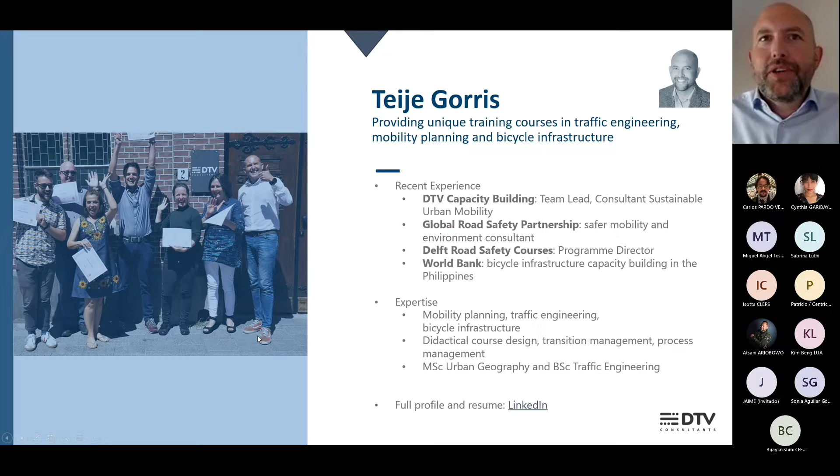I'm educated as a traffic engineer, so I will mainly focus on engineering. I also think that safer road design, the engineering part, is really a basis for effective enforcement and education. So I think safer mobility interventions in the end should not start with enforcement and education, but start with a safer road design.

And with an engineering bias, I'm also Dutch, based in the Netherlands. I have decided to choose a bit of a cycling bias for today, also to bring about some messages I would like to share.

As a Dutchman who cycles, I don't consider myself a cyclist - for me it's a mode of transport, one of the ways to drop off my kids to school. These are my sons, Thomas and Pim, now at the age of 6 and 10, so they ride their bicycles, and they also wish you good luck for this session today.

I also thought, should I start with theory and concepts, or just dig in? I chose the latter. So I will start with some pictures and examples, and I'd like to invite you to contribute and put some responses in the chat. Now I have to admit, I have to seek for the chat window - yes, you have to arrange some windows over here.

So what I'm going to put on the screen is a picture of a Dutch intersection. I'd like to raise an open question: which kind of safety features can you recognize here? Could you provide your answers to this question in the chat? If you see something, just write a couple of keywords and put them in the chat, please.

So what makes this a safe intersection? The first ones - take some seconds to think about this. I see some good stuff coming up already, that's great, thanks. So I know you are there.

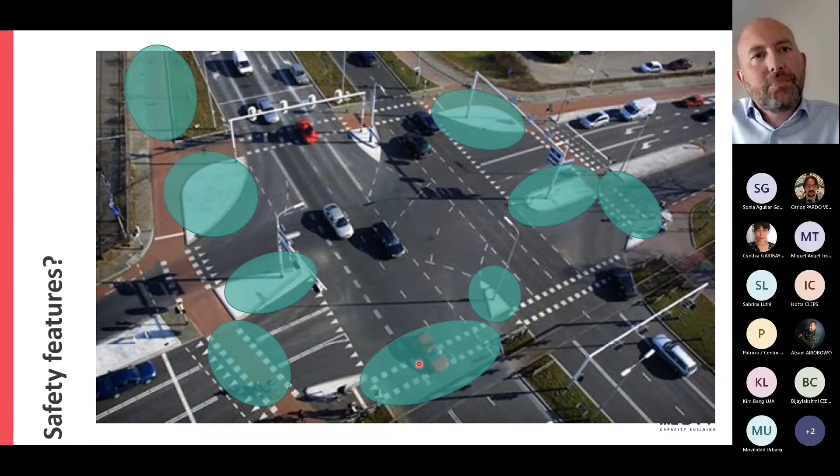Also markings are used - bicycle lanes are supported with markings, and motorized traffic lanes are supported with some markings too. This is the theory, and I've summarized it here: the priority arrangements of cyclists follow the priority arrangements of the main carriageway. Where cyclists don't have priority, the red paint isn't used.

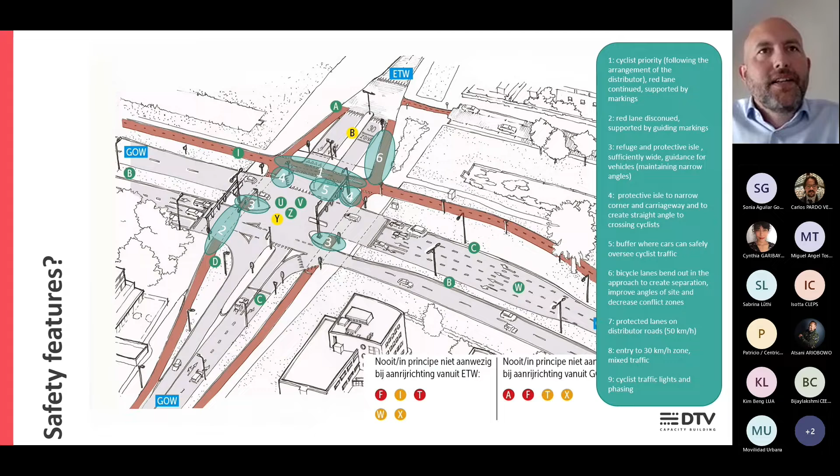The protective isles are visible also in the corners, with narrow lane widths and some buffer space for cars to yield when necessary. There's the bending out in the approach, and bending in after the intersection. Protected lanes on distributor roads show quite some space for separation and protection, and only after the intersection do we enter a living street or living area.

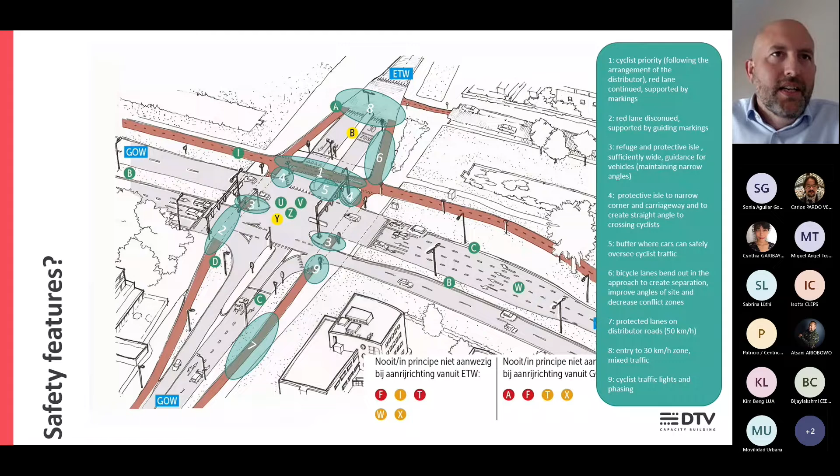Traffic lights are highlighted here. This was a Dutch example, but we also see this internationally to make intersections safe. This example was quite big - this is a smaller one, also from the textbook.

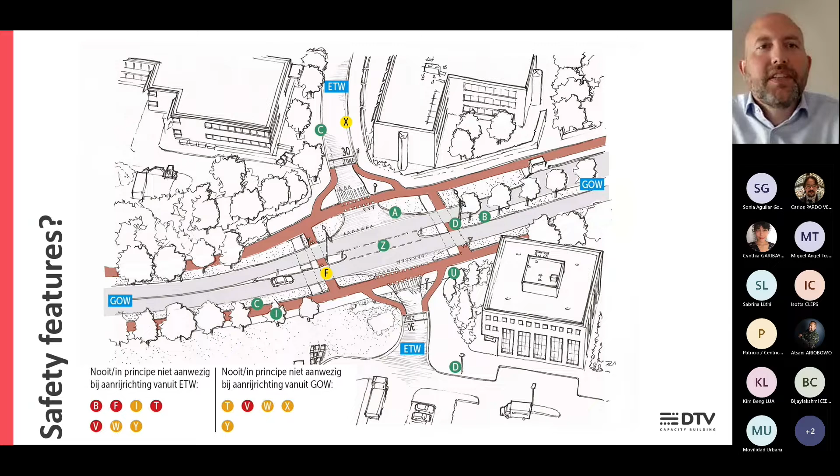This is a distributor road crossing with a living street, a residential road, no traffic lights involved. We have the priority arrangements, with markings supporting and identifying that, and signage highlighting it as well. At this stage, cyclists and pedestrians do not have priority - it's the motorized traffic ongoing here that has the right of way.

The protective isles are in place here too, also in the corners, with some buffer zones for right turning traffic that needs to yield, giving them a clear angle of sight. Coming from the north approaching the crossing, you bend out, creating room for these protective isles and better lines of sight.

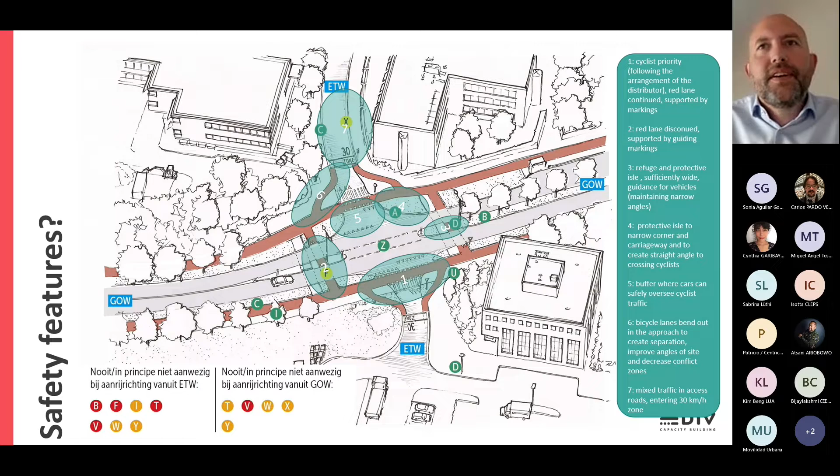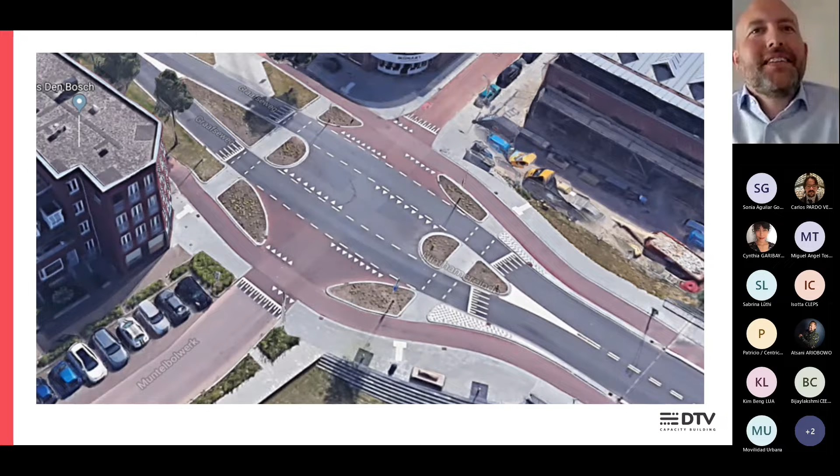And this is how it looks in practice. There's no traffic in this picture, but it shows that it can be realized. Perhaps there's quite some room over here.

And we also like to see roundabouts for crossings to be a safe solution here, both for flow and for road safety.

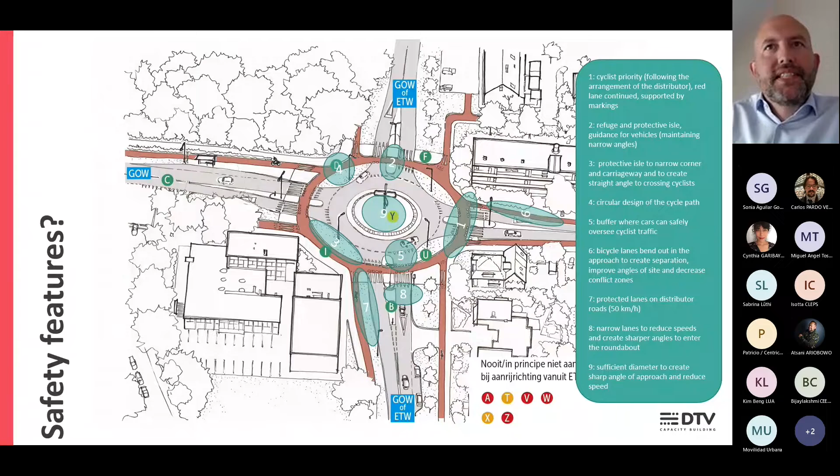Summarizing some key features: physical separation of vulnerable road users, delineation through markings and separations, which is really important. Try to minimize the exposure through refuge isles, smaller profiles and radii. We try to avoid slip roads and avoid unnecessary road space for motorized traffic which is not used or not necessary. Straight angles in the approach and understandable situations. By doing this, we really try to reduce speeds and create understandable traffic situations and lines of sight.

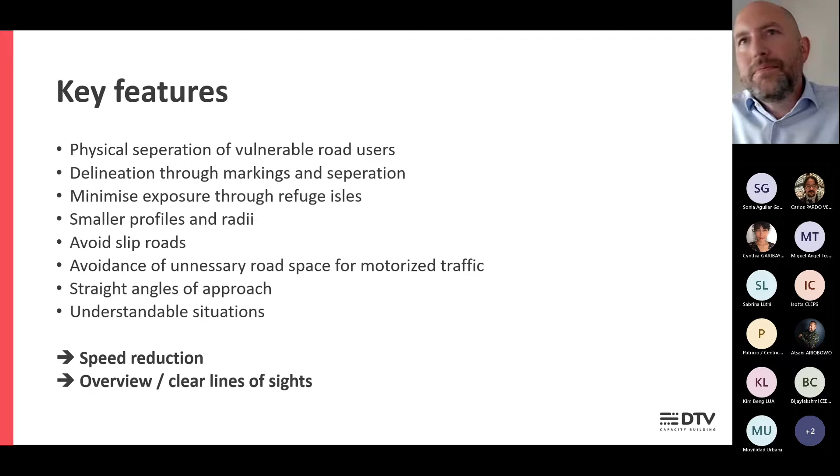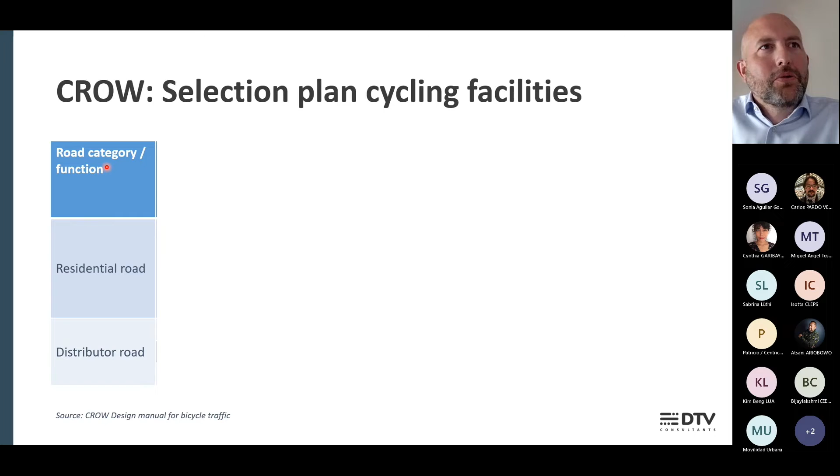Also to continue with some examples, bicycle examples on the section parts, and I'll later explain why I'm focusing on this so much. So also how we do it in the Netherlands in this case - where do we plan what type of cycling facilities? We really start with what kind of road category we're thinking of: is it the residential road or is it the distributor road?

What are the speed limits involved? We have various types of distributor roads. The residential roads in principle are at 30 kilometers an hour. The volume of traffic we take into account on the residential roads. In distributor roads we don't, and I will also explain why.

So next to the road type and the characteristic of motorized traffic, we also consider what type of bicycle network, or which part of the bicycle network are we discussing. Is it just basic, or is it part of the main network, or is it even higher up, the highest level in the hierarchy - could be a bicycle highway even. And based on that, we come to a selection.

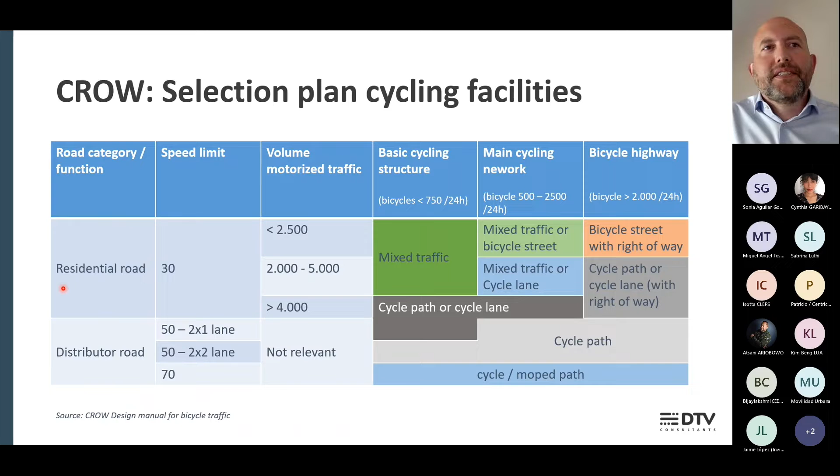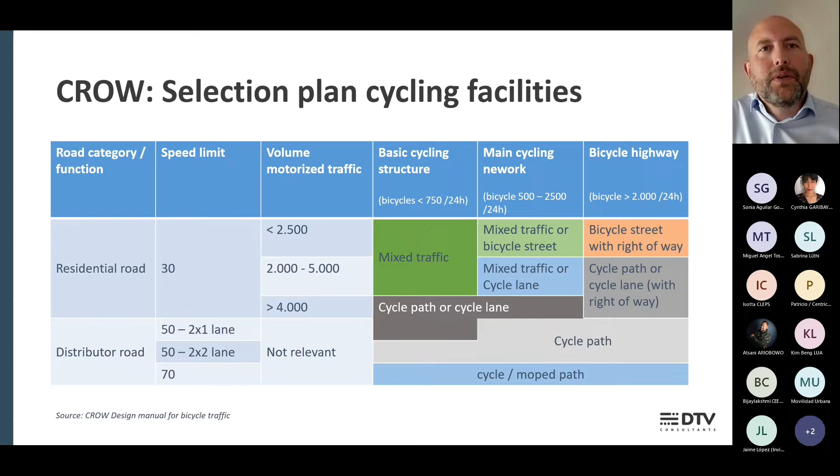So you see at residential roads, well, we also try to mix, or we make some separate paths or lanes because it's the highest in the hierarchy. So we really want high quality bicycle lanes. And there we want to consider paths also at higher traffic volumes. As you can see, if we are above speed limits of 30 kilometers an hour, up to 50 and 70, we really want to go for separated paths. At lower speeds we could have an exemption, but in the majority, we really want separation because that's safer. That leads to these kinds of profiles.

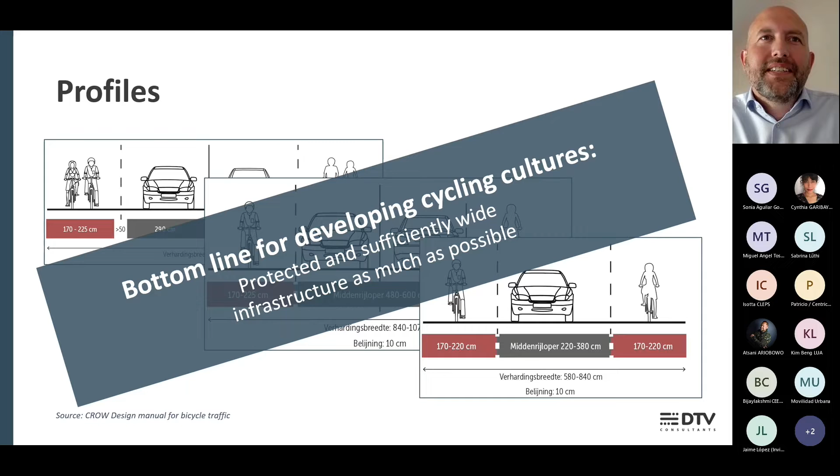This is all in Dutch, but I think the bottom line, what I'm trying to say here, is also for developing cycling cultures: it's really to have infrastructure for vulnerable road users, cyclists, pedestrians, protected and sufficiently wide as much as possible.

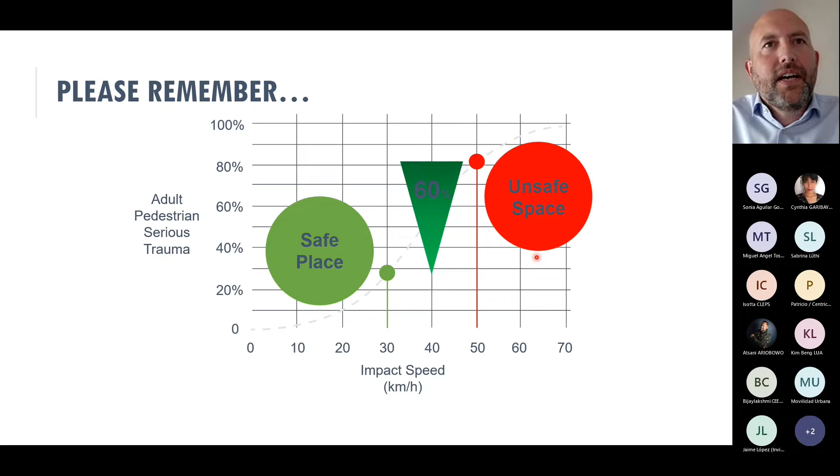The idea behind this is that the difference between impacts at 30 km/h and 50 km/h is really significant in terms of trauma. So you could say up to 30 km/h it's a safe place, which is why it's relevant to mix cyclists with motorized traffic. But at higher speed limits, it's unsafe, and that's why we want to have it protected.

We also need to see this in the context of movement and place. We have areas in our city designated for movement, or outside cities, motorways, or corridors leading into cities, dedicated for cars, for motorized traffic. These are the arterial veins for this kind of traffic. On the other side, we have places for people, like parks and parklets, where we want to stay and be.

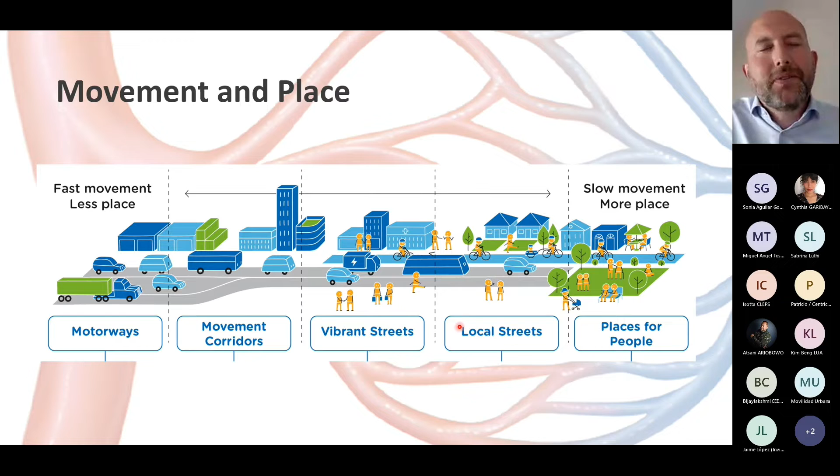In this figure, there is motorized traffic, but it's also in the area in between where we need to be careful—the local streets, the vibrant streets, where we have both. Here we really don't want to be as a pedestrian or cyclist, because it's not pleasant, not comfortable, not attractive, and it is unsafe. So if we're thinking of cycling or walking, we should think of other routes, other connections. Here in vibrant, local streets, we really need to think about speed management and separation.

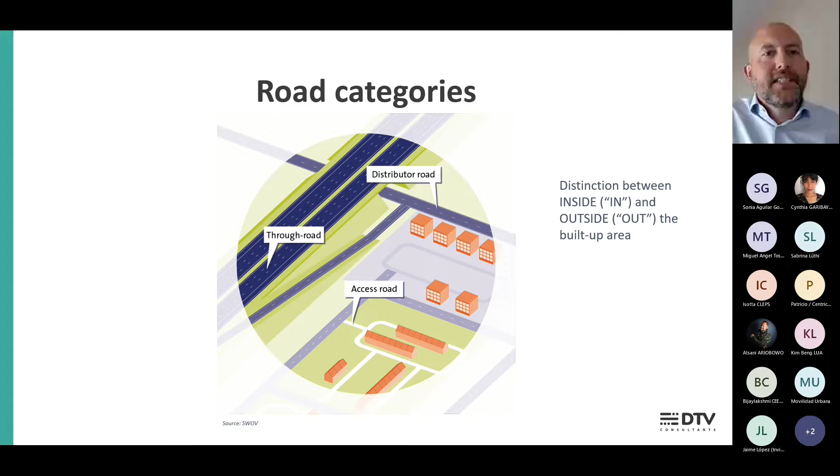In this context, it helps to think in road categories—making some roads for flow, for movement, optimized for traffic volumes and speeds. We have distributors connecting the flow roads with cities and residential areas, and access roads to really connect and arrive at your destination. So we need to think about what the function of the road is. I just highlighted the Dutch differentiation, or variation.

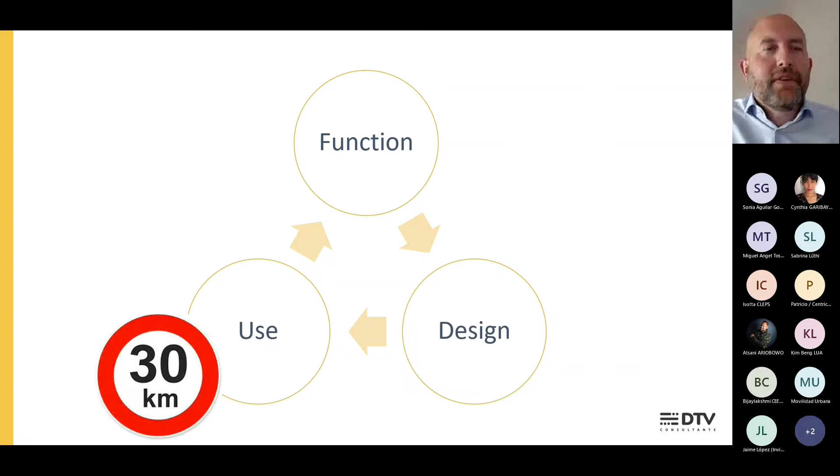Following from that, we want to design for a design speed—the maximum speed—and decide whether you want separated bicycle lanes or to mix them. That should lead to a desired and safe use. In other words, if we want traffic acting at a speed limit of 30 km/h, we want the design to invite that behavior, and to assign parts of the network to be residential streets at 30 km/h.

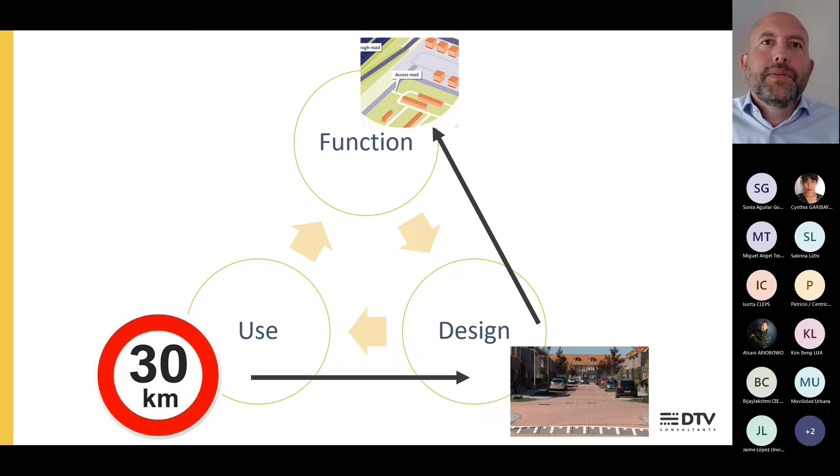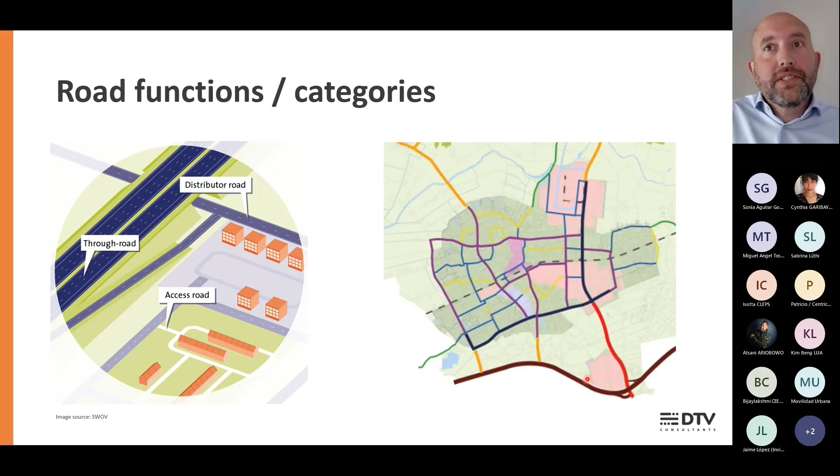This could be integrated in network plans, assigning in urban areas—and also outside—which roads are intended to distribute, which roads are intended for access, where we want to concentrate motorized traffic, and where we want to prioritize vulnerable road users, designing accordingly.

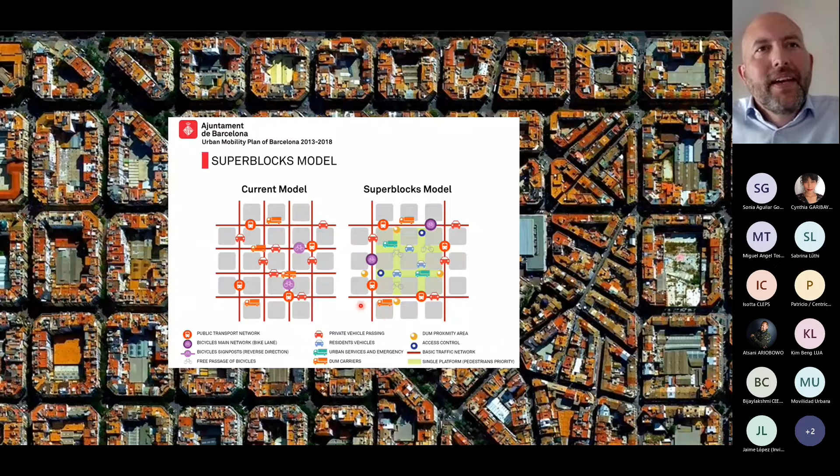To conclude, some examples. In terms of network development and planning, this is Barcelona, where they use superblocks to cut out some elements within the larger blocks, cutting down traffic there and prioritizing cyclists and pedestrians on the inside, while concentrating the bigger flows of traffic on the outside. So it isn't necessary to have car traffic everywhere—we can concentrate that on the edges.

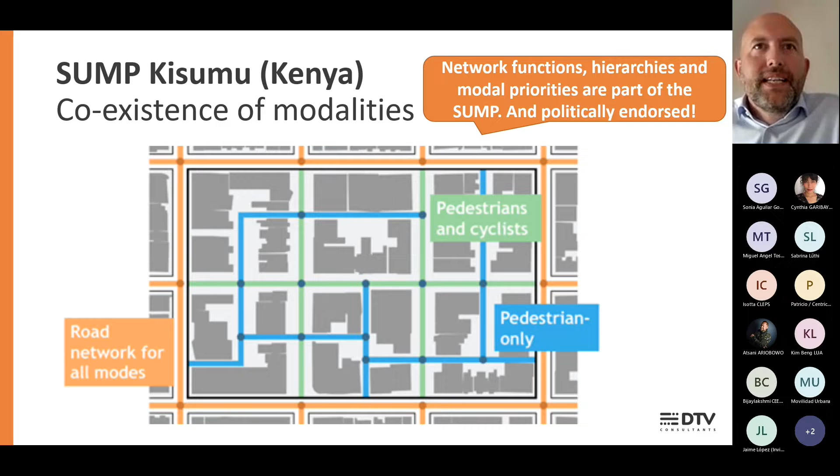It's not just in Western cities. This is an example from the SUMP, Sustainable Urban Mobility Plan, of Kisumu in Kenya, where they did the same—assigning road networks for all modes in their grid, while also prioritizing vulnerable road users in certain areas and implementing safer design. These functions and priorities are also part of the policy plan, and in that sense politically endorsed.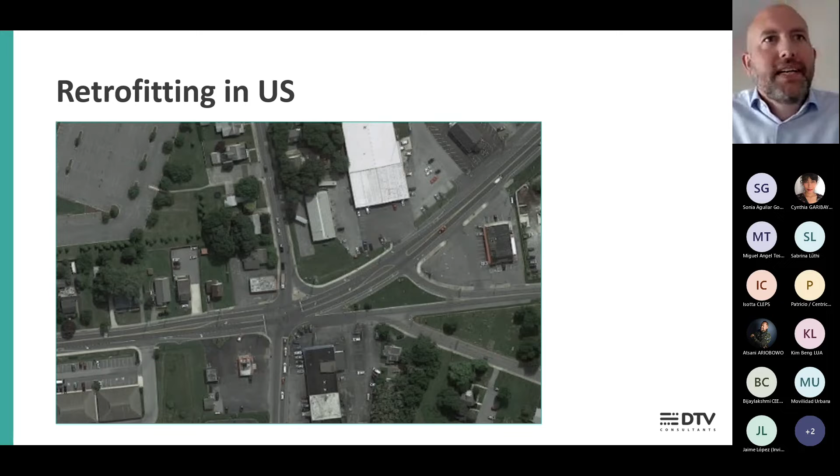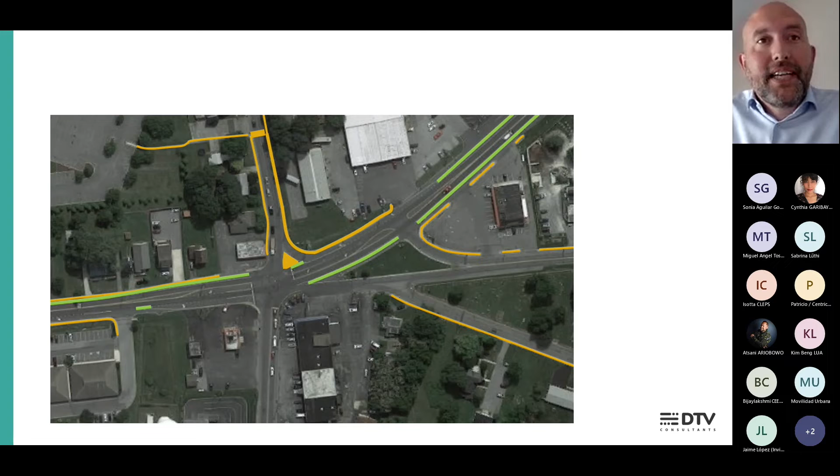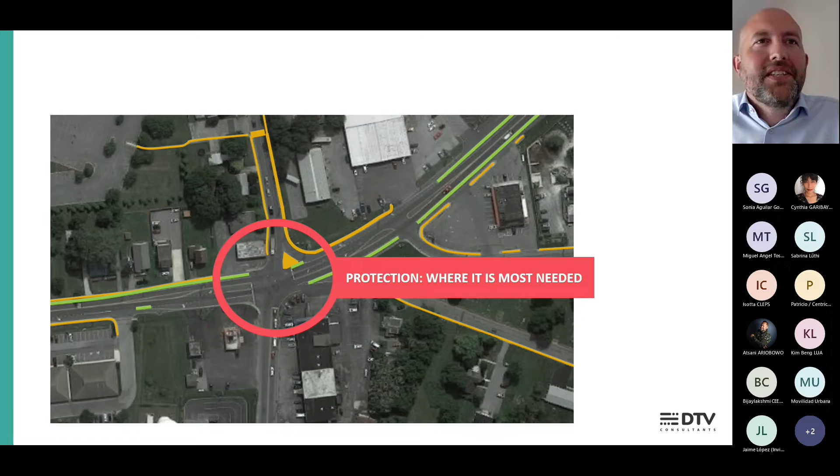Some examples we worked on in the US, also typical US intersection close to a high school with some infrastructure for pedestrians, cyclists, not really optimal yet, and the protection where it's most needed in the intersection. So this could be treated like this, coming back to the example of the intersections, the protective islands again, the bending out, the zebras there in place.

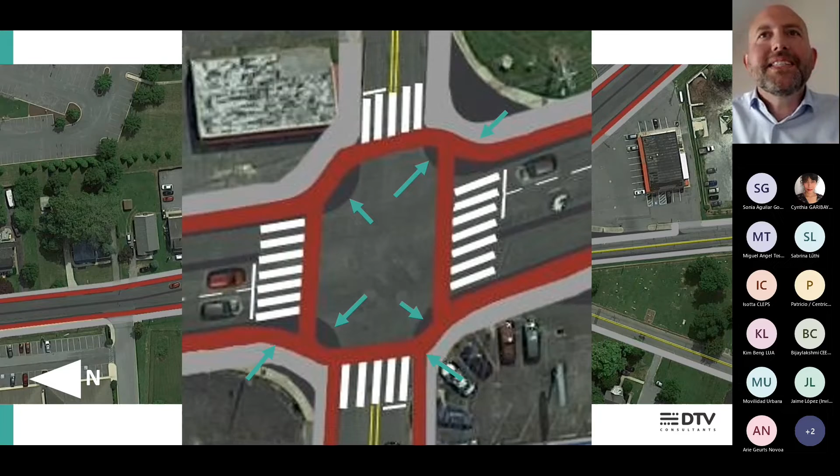This is mentioned here, so perhaps a lot of information for this short, a little bit more than 20 minutes. But I think safer road design really starts with thinking at the network level, categorizing your roads, really to consider separated infrastructure for vulnerable road users in case of speed limits more than 30 km/h. Delineation really helps, and space for motorized traffic is often over-dimensioned, I would say. A lot of times, people or decision makers or road authorities think this space is necessary, but I think facts will show that this is not the case.

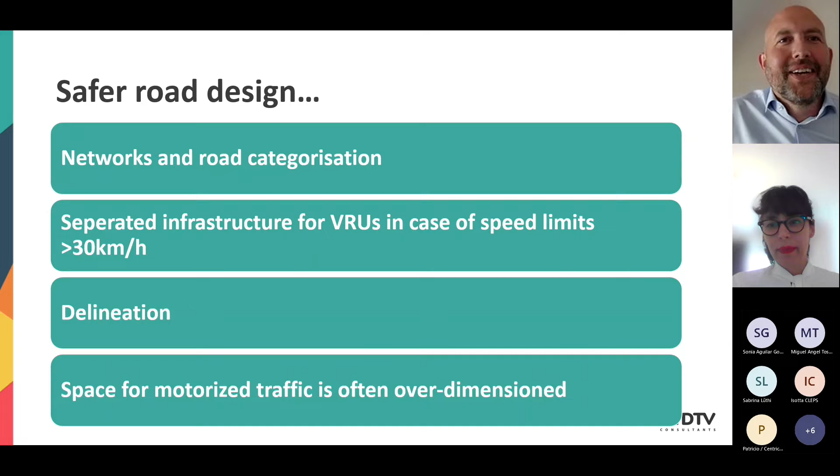So this is where I conclude my story. If you have project designs, as GRSP consultant I'm able to support, help out on reviewing some projects you are working on. And we could also consider setting up training to really dig into the details of some of the elements I introduced today. So thanks for your attention.

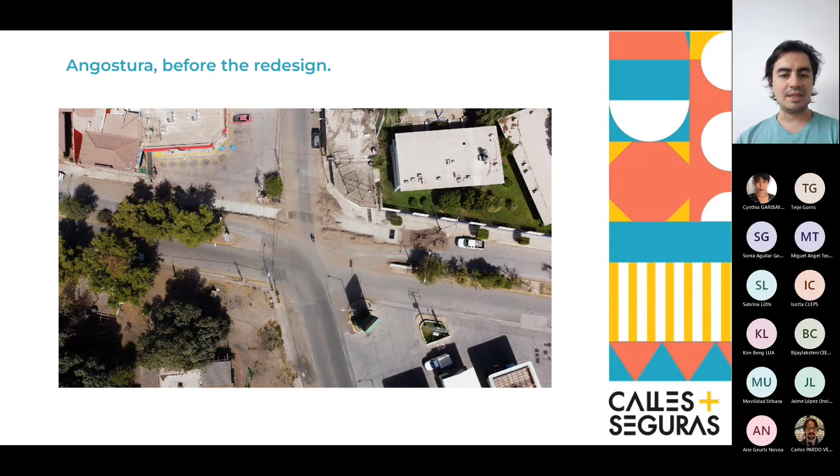So here we can see some of the concepts that Teije has shown us in his presentation, applied into the Mexican context. The government of Angostura wanted to initiate or mark the start of a bicycle lane that you can see on the part of the street that goes north. We have speed bumps that help us reduce vehicle speed, so that we can sustain a maximum speed of 20 kilometers per hour. These are all interventions made within school environments, school entourages.

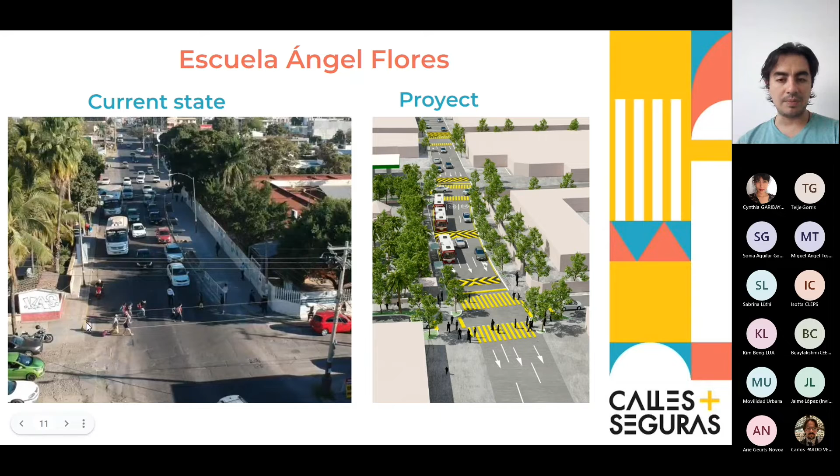This is the part behind the school, further back. Once again, the speed bumps are already there. They were already painted, but with time they've worn out. So when we go back, we will paint them again.

That's it. That's a very brief presentation of our work, and I want to share with you just a short video of how Culiacán is working at the moment.

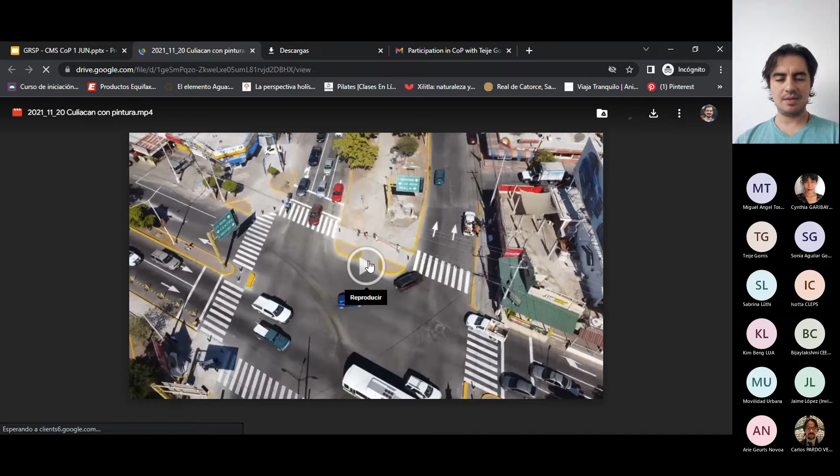Let's try to make it. No, I'm guessing we won't. So, in the sake of time, maybe we can share another video.

This is, if you want, play yours, Miguel. Yes, this is from

This is part of our communications that we've been working towards with Reflexiona. Suffice it to say that these are not just projects made by Centrico. This is a project made by Centrico and Reflexiona from Mexico City.